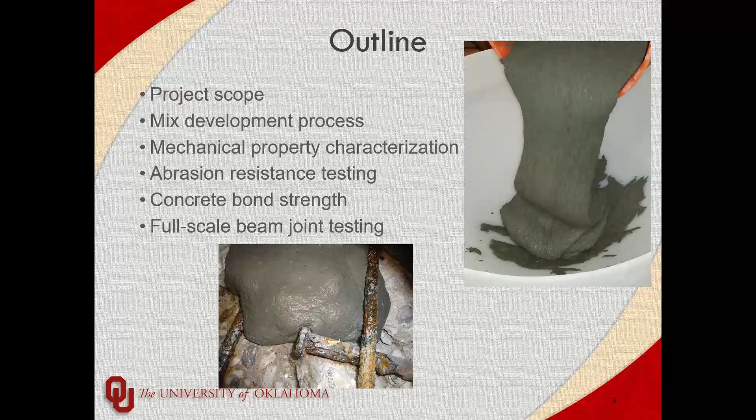So the first step for this was to develop the actual ultra-high performance concrete, or UHPC, mix design. To make it mostly cheaper and easier for ODOT, we tried to use locally available materials wherever possible. We started out trying to get everything locally, but unfortunately, a lot of the materials that go into UHPC aren't actually produced in Oklahoma, so we did have to go out of state for a number of things, but we tried to pick places that were easier to ship from, or things that were readily available.

For that characterization, we did compressive strength, modulus of rupture, and modulus of elasticity, just typical properties that you would need in design and understanding of UHPC. Then, because the intent was to use this as a bridge repair, we tested some other properties that were very important for repairs, mainly concrete bond, how well it would bond to existing concrete, as well as abrasion resistance, since there may be instances where it's used as a roadway surface or anything like that, and we wanted to make sure that it could perform as well as some of the other materials available.

And then lastly, we did the large scale slab tests, which were mimicked after a bridge in Oklahoma, and we actually created these 8-foot slabs that we connected and tested under a single point load. Next slide.

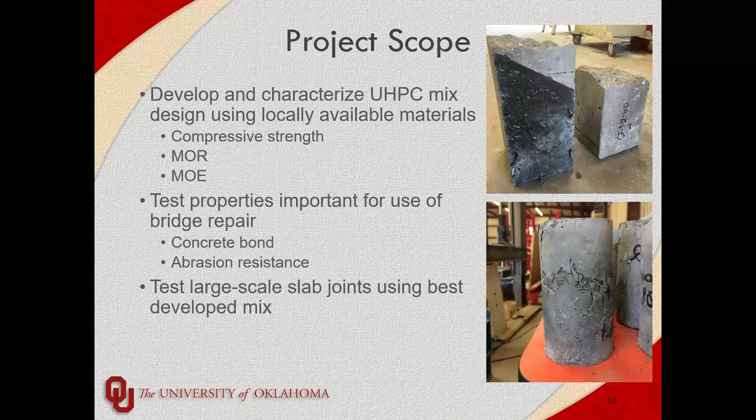So as I said, local materials whenever we could, but unfortunately we weren't able to, and the mix development process took about 1.5 years total. We went through a number of different mix designs, but we used mainly type 1 and 3 cements.

The supplementary cementitious materials we focused on were fly ash, slag cement, silica fume, and vitrified calcium aluminosilicate. It's a product that Vitro Minerals produces, very similar to slag cement. Since it's produced, the gradation is more even, as well as the chemical composition. We used fine masonry sand, very similar to most other UHPC mixes, high range water reducer, and commercially available steel fibers.

We started the process looking at some already published mix designs from the FHWA. We figured that'd be a good starting point, and maybe if we got lucky, the materials we were using would produce similar results, and we would only have to do some fine tweaking. But unfortunately, it didn't work that way.

We found that a lot of the mix designs we mimicked didn't actually get the same properties as the FHWA had published, and figuring there could be any number of reasons, we decided to branch out and look at different materials and mix designs to find what the best combination would be. Our next step was looking at particle packing, which is pretty common in UHPC mix design.

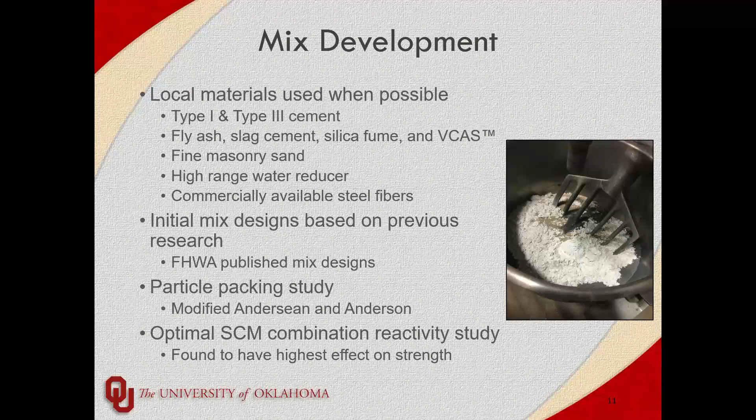I bring this slide up mainly because in our mix design, some of the materials we use are slightly different. On the left, you see the fibers that we used, and you'll notice the most common fibers used inside of UHPC are kind of hair-like. They're Dramix fibers from Bekaert, half an inch long, 0.2 millimeter diameter, little hairs. I call them little hypodermic needles when you get them in UHPC.

But because of the expense, and we were trying to really reduce the cost of our mix, we decided to go with a cheaper fiber, about 1 inch long. They're meant for reactive or refractory concrete. But their weight did cause us some problems because they're much heavier than the Dramix, so we had to adjust our high range water reducer differently so we could maintain a flowable mix and keep those fibers in suspension, as opposed to adding too much high range and having them all sink.

The other slight difference, although it's become common as we've gone along, is we used masonry sand, and if you look at it, it looks more like a play sand, or a paver sand. This was actually just readily available sand locally in Norman, Oklahoma, where our school is. There's really not a whole lot special about it outside of the fact that it doesn't have very large particles. I think the highest particle size we've had in this is 1 millimeter.

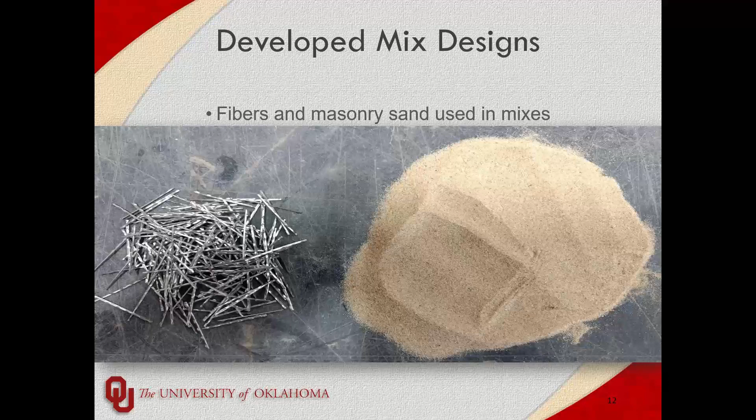And we went through a bunch of series. We labeled them by letters, series A all the way up to J. Series A started out with the mixes from FHWA, and then through all of our reactivity studies and our particle packing and looking at all of our different SCMs, we got to series J, where we combined all the promising things that we saw into a bunch of mixes, and then we narrowed it down to these three to characterize.

J8 is the only one that uses the VCAS. It's sort of something similar to slag cement, which is much more expensive. And then J3 and J13 were the two we picked, and they actually had the most slag cement.

One thing we found when we started using slag cement in our mixes was that we were able to reduce the amount of silica fume we use. If you notice, our silica fume is actually really low, about 10% of the cementitious, which is lower than typical UHPC mixes, and we replaced it more or less with slag cement. The silica fume, because it's such a fine particle, tends to make UHPC super sticky and really hard to work with. So it becomes a problem if you add too much silica fume, because conversely, the silica fume also gives density, increased durability properties, and increased strength properties. So you've got to be careful when you start reducing the silica fume.

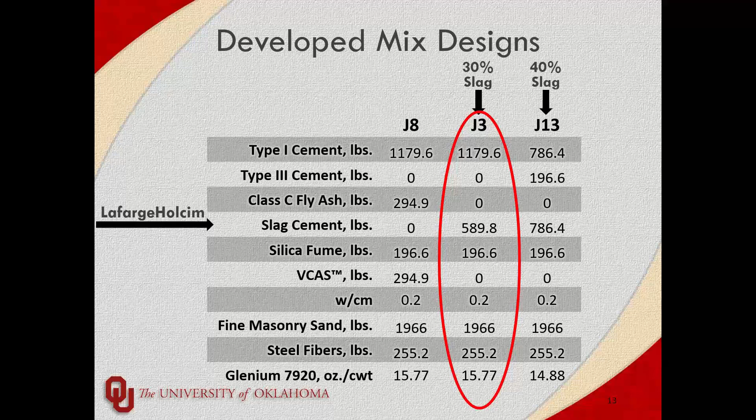Workability in repairs is very important, especially when you use UHPC, because the benefit of using UHPC is its strength, and because it's so strong, you can use much smaller repairs and much smaller joints. And because they're so small and can be congested, you need a highly flowable mix to actually get into all those recesses. So J3 struck that balance between workability and strength that we were looking for, and we went ahead and did most of our big scale testing with that. Next slide.

As I mentioned before, the properties we tested were typical characterization properties: compressive strength, modulus of rupture, and modulus of elasticity. One thing that is pretty common with UHPC is heat curing. If you heat cure it, you tend to get slightly higher strength. So we decided to do compressive testing heat cured to see how well it compared.

We also adjusted the level of heat curing, because at the time there was no ASTM available for UHPC, so we were trying to come up with our own heat curing regimes that we could give to ODOT. We looked at different heat curing methods, and one of the best ways we saw was putting them in an oven in a little tray filled about halfway with water, so it sort of mimics steam curing. We got it up to about 180 degrees Fahrenheit and cured it for various amounts of time.

For the fiber content, we only did compression and MOR with fibers as well as without, and the modulus of elasticity we only did without fibers. Next slide.

Hey Trevor, really quick, we got one question that came in: what are the dimensions of the fibers you were working with?

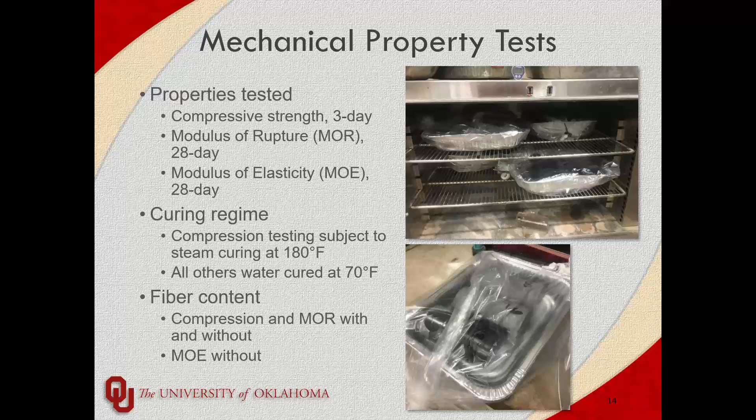One thing to note about those, and this caused us no end of trouble, is they were heavier than the Dramix fibers. So we looked into how to optimize flowability without compromising the way they float, because making them sink is a big issue with UHPC in general. You want higher flowability so it flows better through congested areas, but the higher flowability you have, the less likely you are to keep the fibers suspended, even with Dramix fibers. You end up with segregation. I've seen that with Dramix fibers in our lab - once you get above 10.5 inch flow, they don't tend to stay suspended, which becomes a problem.

As I mentioned, compressive strength was tested at different heat curing times. The temperature was the same, and they all had about the same amount of water in those tubs. One thing we noticed is that 36 hours was about the best heat curing time for all three concretes tested.

We also noticed that heat curing seemed to be much more effective with the steel fibers as opposed to without. I think that has something to do with the steel fibers being able to radiate heat inside the material more effectively compared to unreinforced UHPC, where the heat just has to traverse the cross section to reach the center. Because these fibers tend to touch and collect, they send heat to the inside of the cylinders much faster, so you get some benefit from heat curing using those fibers.

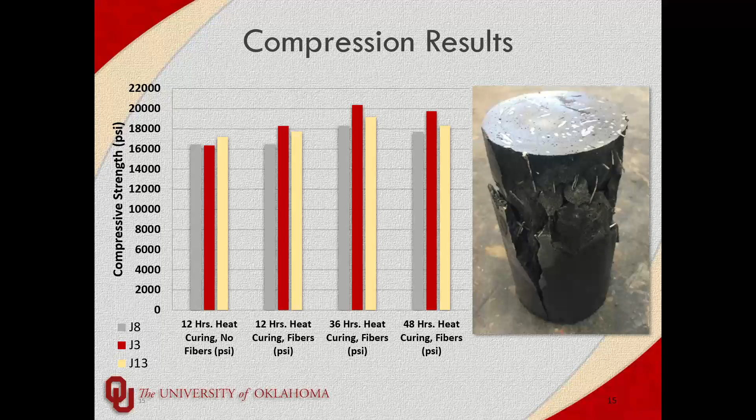One thing we found a little strange was that after 36 hours of heat curing, at 48 hours there was a slight drop in strength, which we thought might indicate an upper bound - that if you heat cured it too long, you could start damaging it or drying it out, which could cause issues. So we decided to stick with a 36-hour heat cure for our study, and that was the recommendation we gave to ODOT.

Our Modulus of rupture results were a little interesting. With compressive strengths, all the mixes were relatively similar - J3 outperformed them, but not by a whole lot. But for Modulus of rupture, J13 really outperformed everything in bending, which was surprising. J3 and J8 were relatively similar.

The most interesting thing to note is that when we reached pretty high levels of Modulus of rupture, even for a UHPC - the first bar on the plot is the first cracking, not even the ultimate strength. We wanted to evaluate how much those fibers helped up to cracking, and it didn't seem to help much at all.

But the unreinforced Modulus of rupture tests - every single one had this really interesting failure crack. It started vertical at the bottom where the highest flexural tension stress is, then as it reached up, they all had a slight curve to about 1/8 of an inch from the top of the specimen, and then a jog back, which we're still not sure what it indicated. It's something I'd personally like to study more, because it looks more like a tearing motion than a typical concrete cracking motion, which could indicate potential for increased energy absorption capabilities.

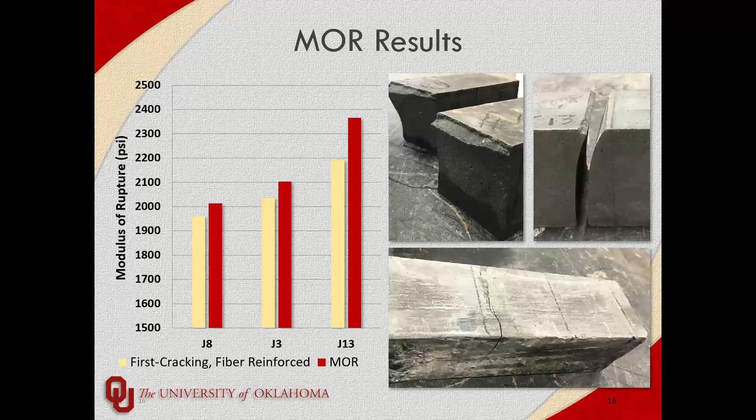Okay, one more question before we keep going - what is VCAS? Is it similar to silica fume? It's more similar to slag, but it's a manufactured product, whereas slag is a recycled product from making steel. The VCAS is something - I forget what it's made out of, probably some level of silicates and clays - they make it similar to cement, blend it, and get the gradation they want.

But because it is manufactured, I noticed it didn't seem to react as well, which is why J8 didn't seem to have - we'll say it was the lowest performing, in my opinion, of the other mixes. Because it was a manufactured product, I don't think it blended or mixed as well with everything we used, including the cements.

Is that it? Yep, that was it. Let me know if you need me to go ahead one more slide or if that's good. Nope, this is perfect, I'll get going.

The last characterization we did was the modulus of elasticity, compared against two different equations: the typical ACI equation for normal weight concrete, and the Russel and Graybeal equation, developed by some of the earlier pioneers of UHPC as a relationship similar to normal strength concrete but for UHPC - you'll notice it's a smaller multiplier. That's pretty typical with higher strength concretes - the relationships become less exaggerated, so you don't always get 10% tension strength out of a UHPC at a higher strength than normal weight concrete, which would be awesome if you got 10% of 22 KSI for tension strength, but unfortunately that's not the case.

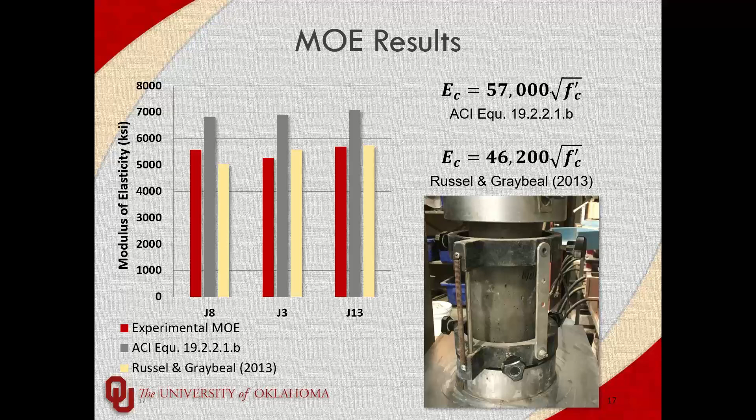Then we did abrasion tests just to verify that it is a more dense material. UHPC is known for having very few voids and being very dense at a microstructure level. But this is an additional test just to clarify that it will be a lot better than normal strength.

But this brings us to what we tried to compare to in some of these in-service tests. We tried to compare it to Ductal, the LafargeHolcim UHPC. As I mentioned, it's the gold standard for UHPC. It outperforms most, and it's been studied for decades. I think it's been around since the early to mid 90s. So there's a lot of research and development that went into that mix, and so we chose it to compare ours to, to see if we could get even close to that, then it must be a good mix.

But as you can see, on the form surface for the abrasion test, our mass loss was much higher than Ductal.

J3 and J13 performed very similarly. It's probably because the slag cement tended to make up for the silica fume better than the VCAS did in J8. But one thing to note, and I think is maybe a slight benefit for our mixes, was the trowel surface, which is just the open surface on the top, was a lot more bubbly with Ductal than with our mixes. There's something about Ductal that causes a lot of the free airspace inside the mix while it cures to come to the surface, so you get this friable surface at the top.

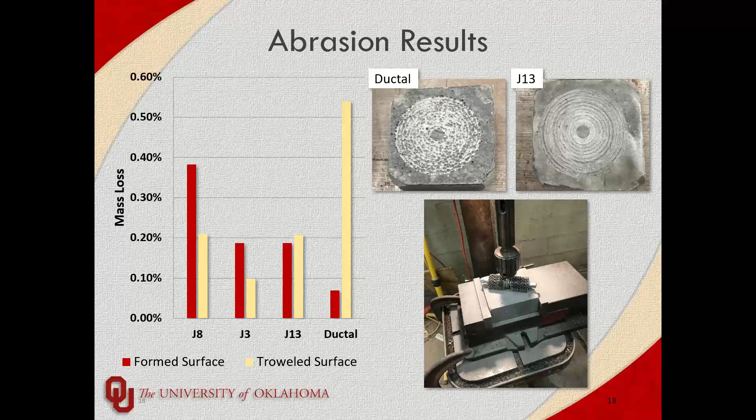Then the last of what I call small scale tests is the concrete bond strength tests. We did a typical mimic of the modulus of rupture test, where we cast half with conventional concrete, let it cure for at least 28 days, and then poured UHPC against it. We varied the angle of the interface as well as the surface condition of the interface. On the upper left, we did an exposed aggregate finish, where we put a retarder on the form surface and sprayed it off to get some of that paste. We also did sandblasted, unclean or just cut, and wire brushed surfaces.

After pouring them and letting the UHPC cure for 28 days in ambient conditions, we tested those in third point bending, similar to the flexural test.

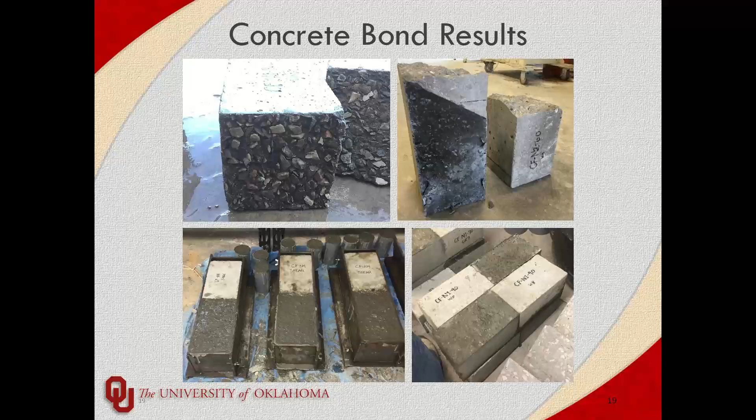One thing to notice is that Ductal performed very well in all of the tests. We only had one of the Ductal specimens, out of all of the tests we did, that actually failed at the interface, and even it failed at a level similar to the monolithic modulus of rupture of the normal strength concrete. The rest of them failed in the normal strength concrete, showing very good bond.

For the J3 that we tested, the bond angles that performed best were 45 and 60 degrees. They performed very similar to the Ductal, even though they did fail at the interface. But one thing we noticed was that while they failed at the interface, they were very similar to the monolithic strength of just the conventional concrete, so we counted that as a win. It would make sense that the weak surface would be the interface.

All of the interface conditions showed that, except for the shear key, which we did the exposed aggregate on. All of the exposed aggregate conditions tend to be much, much lower for J3 than they were for Ductal, and they all failed at the interface.

We believe it's potentially a twofold reason. One, while Ductal is a proprietary blend, we're fairly certain it does have more silica fume, because most UHPC mixes you'll see will have anywhere from 15 to 25 or 30 percent of the cementitious material as silica fume, which is mainly to increase the density, durability, and strength.

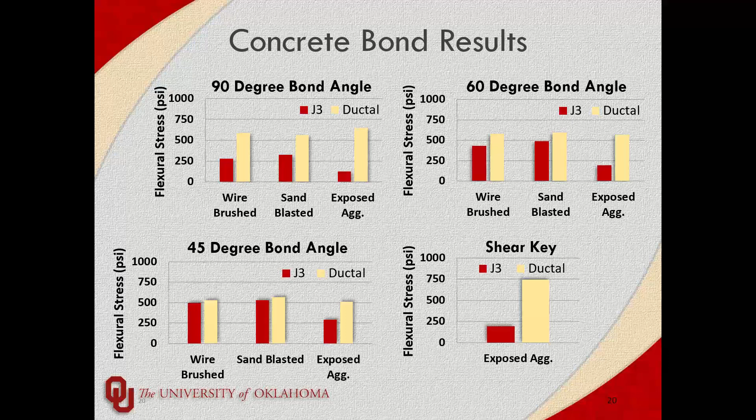Did you say defoamer? Yeah. No, that's mainly the reason I believe we didn't have bubbles rising to the surface - we avoided using that just for cost, but we didn't measure air content. Although that would have been a good number to have to compare to Ductal, because we obviously would have a much more porous structure than Ductal would have.

Is that all? Is it for now? Perfect.

Lastly was our slab joint test, which I thought was the most fun. What we did was we modeled slabs similar to a bridge somewhere in Oklahoma. The bridge was discontinued after a time, but we chose it because it was a pretty common design they used. We got a hold of some of those bridge decks and modeled our deck design after them.

We would cast these 4x4 decks with some bars sticking out about 5 or 8 inches, then tie them together with a very short lap bar in the center, as you can see in the upper right. This equates to approximately an 8 db splice length, which is a common recommendation for ductal UHPC because it has such high strength, and the addition of steel fibers really increases the bond strength and reduces that development length.

So to test it out, we went ahead and ran with that 8 db limit. We tested slabs with both ductal and J3 as the joint material. To mimic the heat curing, we put a heat lamp over top and covered everything in plastic immediately after casting, because with the low water cement ratios, it's really easy to lose water to evaporation on the surface and get a desiccated surface. We did that to hit our strengths quicker, and we did our cylinders as well to track that strength.

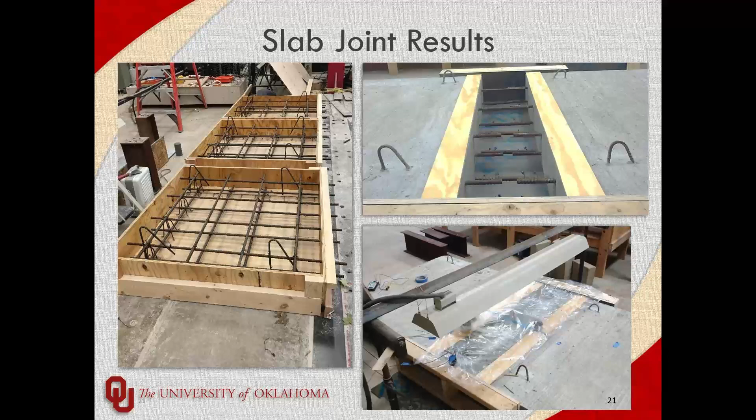This is our slab setup. The two together span about 8 feet, and the joint is about 12 inches wide. We applied the load through what was meant to recreate a wheel load just to the side of the joint. As you can probably tell from this picture, the Ductal is poured just ever so slightly higher per the recommendations.

We didn't grind anything off, we just kept it that way, but we also poured J3 similarly to try to maintain similarities. The load was put just to the side of the joint to help maximize the load applied at the joint interface.

We did both static tests, where we just applied the load until failure, with 2 slabs for each material, and one dynamic test where we did about 1 hertz cyclic loading for 3 million cycles at a load just below the cracking load. Then we increased the load to just above the cracking load and took it until it reached a 3/4 inch deflection limit. After that, we tested that slab to failure under static load.

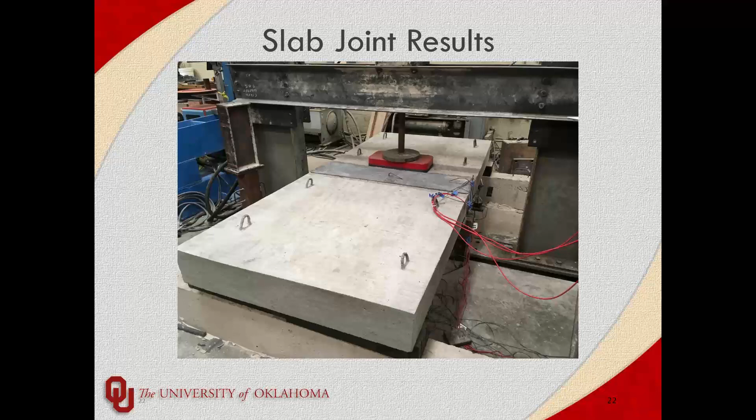Here's a picture of one of the slabs post static load, I believe. You can see there's a nice crack along the top surface, showing that we did fail some of the normal concrete in compression. But one thing we noticed is that all of the failures occurred in the normal strength concrete. We didn't see any cracks in any of the UHPC, which I thought was phenomenal. There was a little bit of joint separation.

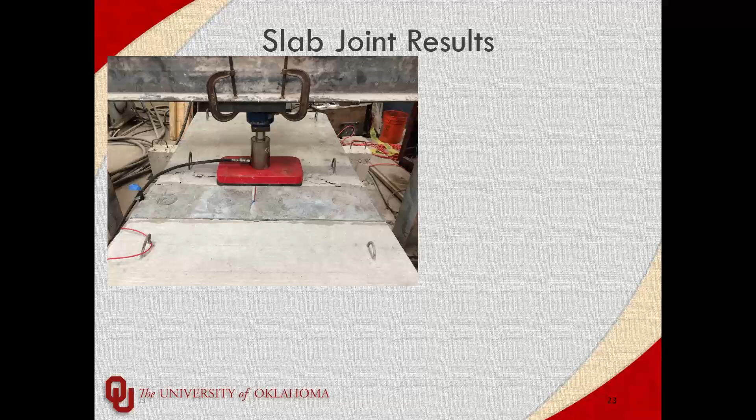That we did see later on. Here's another view of that. Next slide.

This is a close-up of that joint. You'll notice on the left there's a joint separation, which we kind of equated to bar yielding and in a lot of cases bar rupture. But the main crack happened directly over the load point in the normal strength concrete, and like I said, we didn't see any cracks in the UHPC, which we thought was great. Next slide.

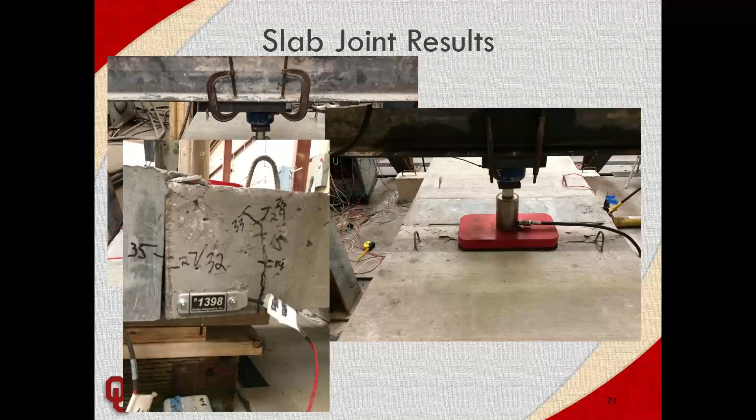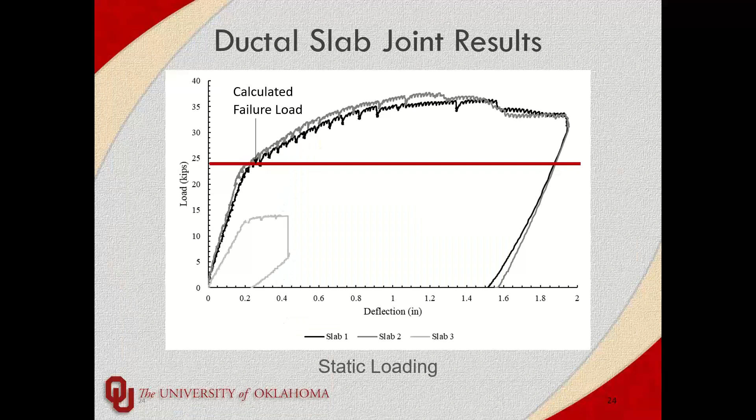The cyclically loaded test was that bottom little plot. It obviously didn't reach as high as the unloaded slabs, but you did get a little bit of ductility, and I was a little surprised at that. I presumed it would have just popped, but we took it, I believe, up to 5 million cycles even after increasing the load. Next slide.

But even with the fatigue test, the cyclic loaded test, we did have a lot of ductility, just like Ductal did, which I thought was great. But one thing to note about all of these tests, which really surprised me, was we had at least one rebar rupture in every single slab that we tested, which shocked me, because with the shortened development length we used, we only had about 5 inches of bar embedded in that concrete.

Even with J3, which was noticeably weaker, I believe it only got up to about 19 KSI. In Ductal, that slab got up to about 23 KSI. But even at that lower strength, we were still able to fully engage the bars with that shortened development length, which I think shows that's mainly just because of the way it flows, because it flows very well.

If you've ever seen UHPC, it kind of flows like putty that just never stops, and it tends to wrap around things very easily. And then the steel fibers were able to help mitigate those micro cracks that you'll get once you start putting concrete in tension. I think all of that combined really improved the bond behavior, even with a lower compressive strength.